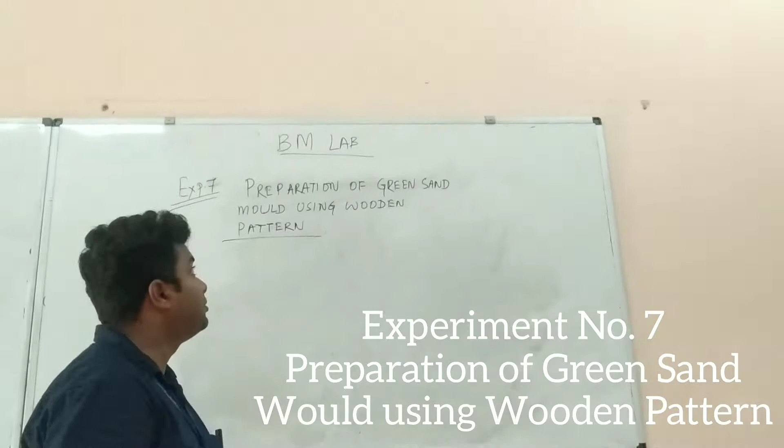So there are two important aspects of this experiment that you need to know. Already you are following basic manufacturing as your theory subject in your theory classes. From there also you can have a little bit of idea on what this experiment will let you know about the casting process. So now let us look at the important aspects of this experiment.

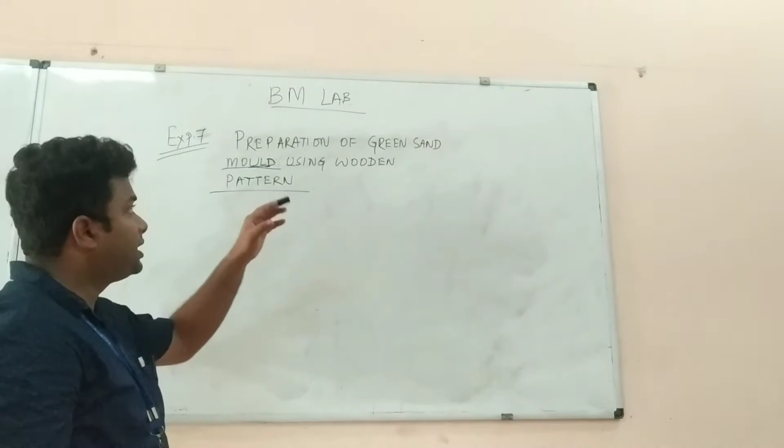One is your mold, that is basically made up of your molding sand, and another is the pattern. So we will make a green sand mold using a wooden pattern. So now patterns can be basically classified as two types. One is single piece

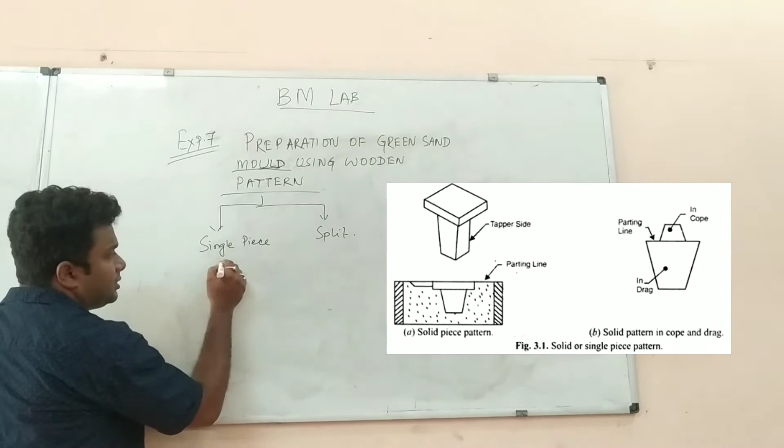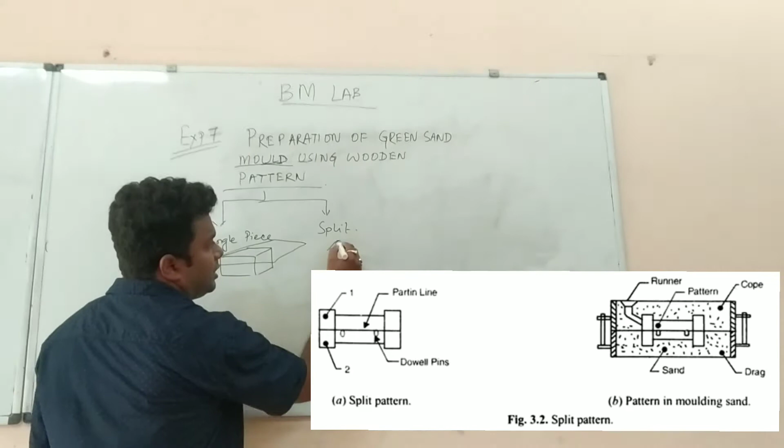or split pattern. Basically a single piece pattern is a pattern which is a single piece like this, and the same pattern, if you cut it into two halves by a section, both the halves are separately known as a split pattern. So these two kinds of patterns are generally used in industries for the pattern making or the mold making process. So this is the pattern.

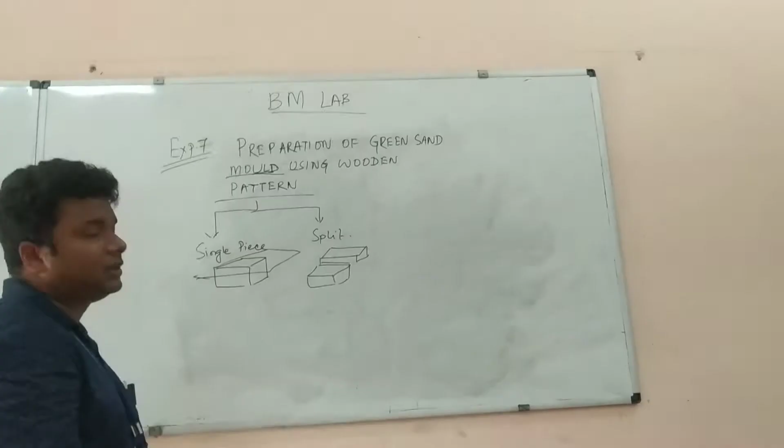Now coming to the mold or the molding sand, you have seen that in the last experiment we have done a grain fineness test where we separated the dry sand according to their sizes in several sieves to achieve two things. One is a particular permeability and another is to have a good surface finish. Now this molding sand consists of sand, basically dry sand, and clay and additives.

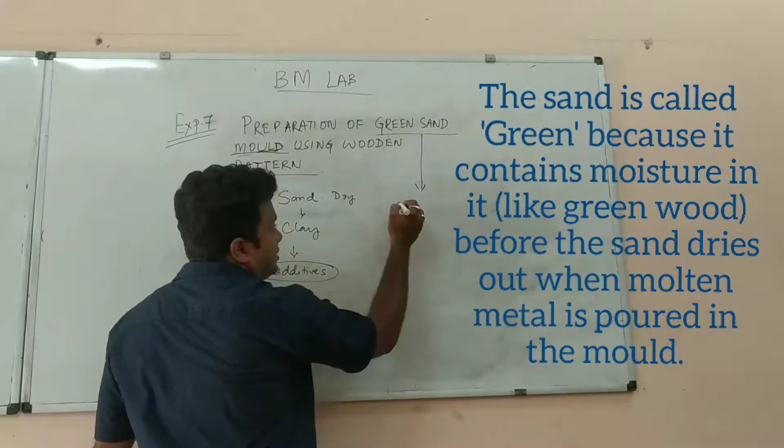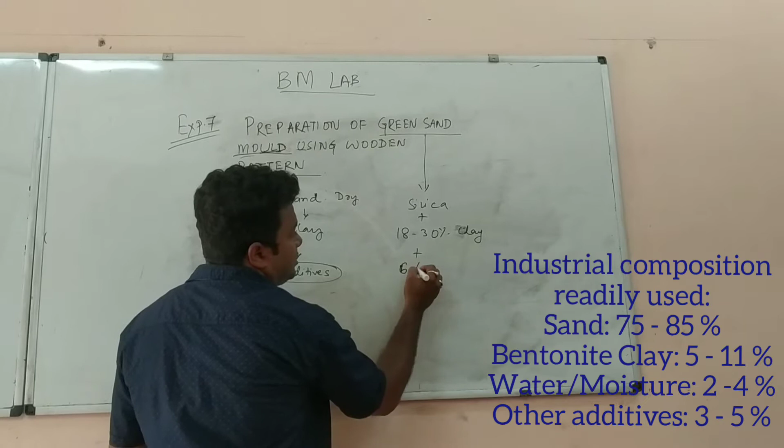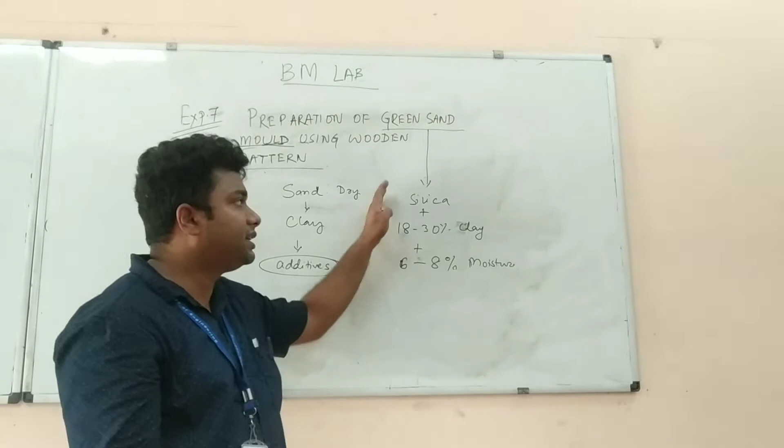Now here our mold sand is basically the green sand. Now what is green sand? Green sand is basically silica plus 18 to 30% binder, 18 to 30% clay, plus 6 to 8% moisture. Moisture is the water which we are adding. So this combination of silica, clay and moisture makes the mixture a green sand mold.

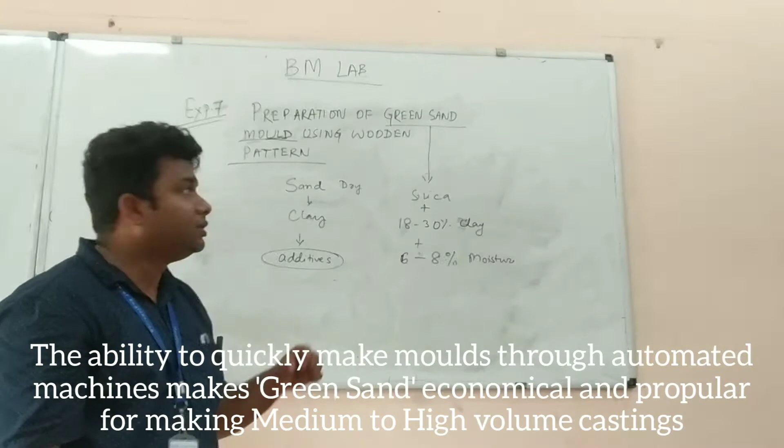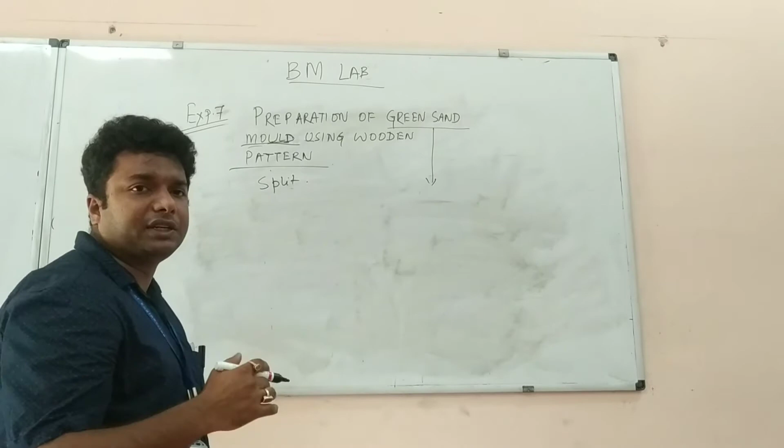So we will be preparing a green sand mold using a wooden pattern. So first we have taken the pattern. Now we will be taking a split pattern here, that is, the pattern will be equally divided into two halves, the upper portion and the lower portion.

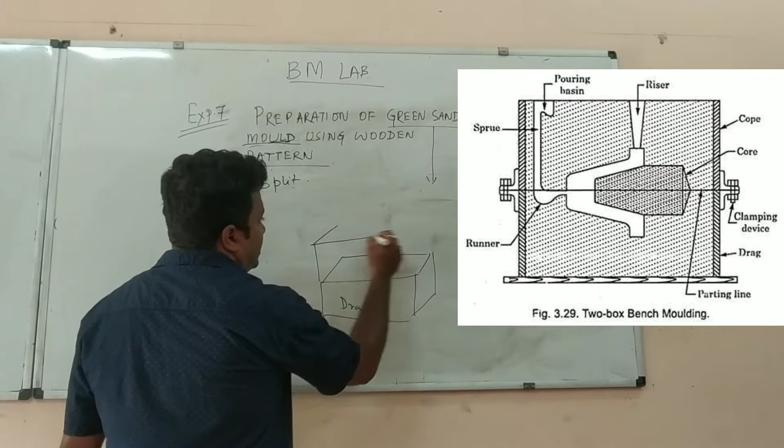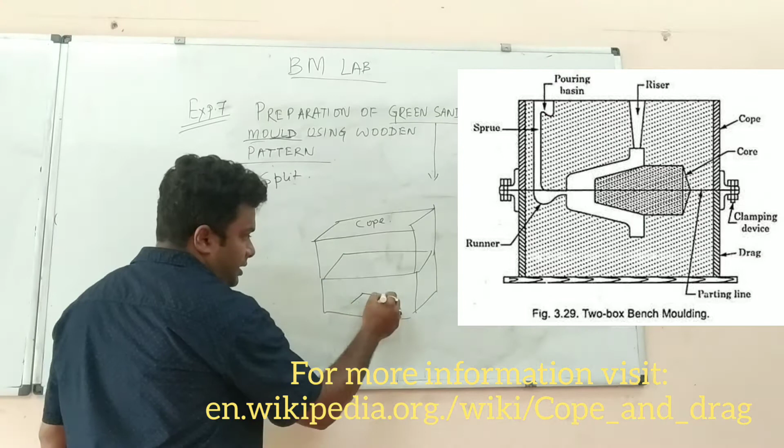And now we need to have a cope box and a drag box. So this is called a drag box, which is the lower box used for casting, and the top box which is used is called the cope box. So in the drag box, first we will place one pattern upside down like this. We will put sand here and we will ram to finish it.

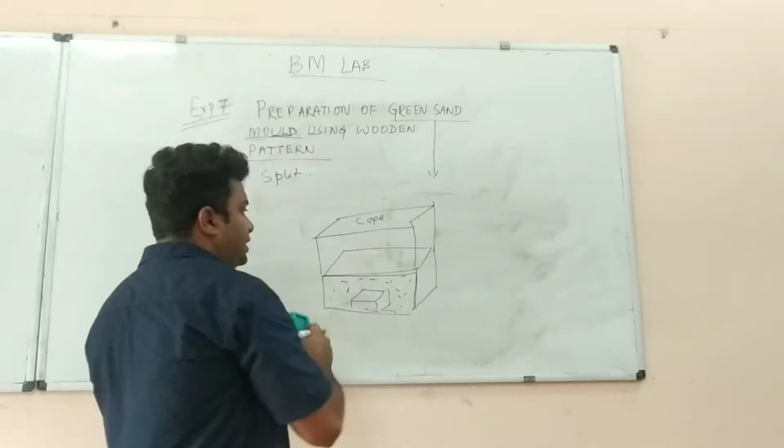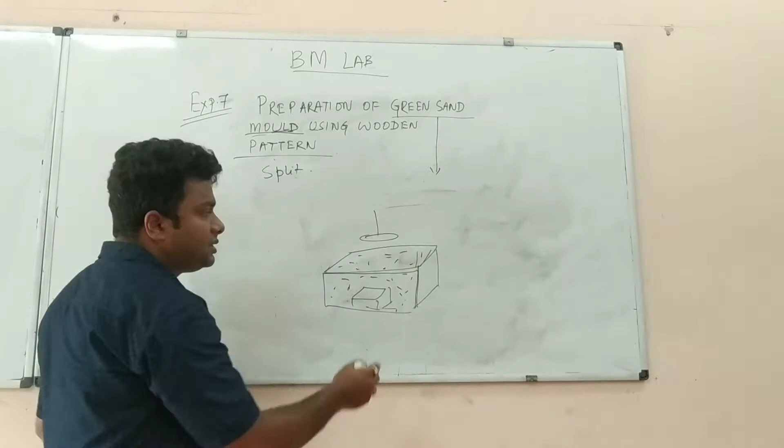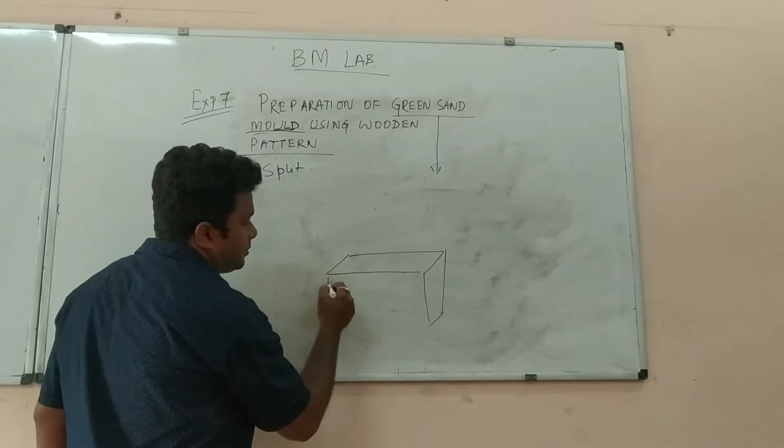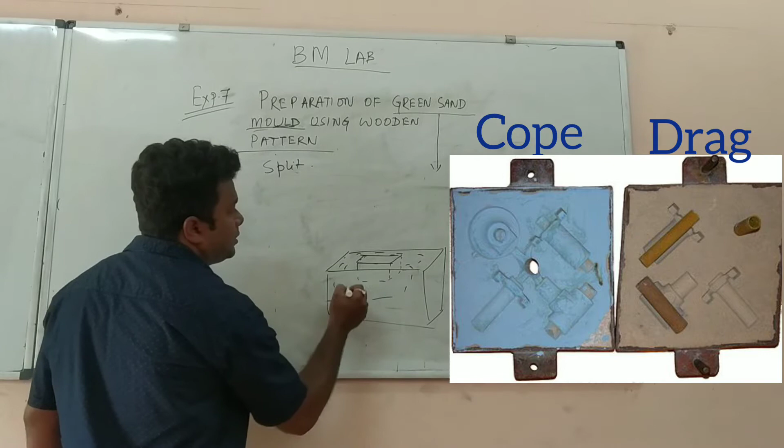Once it is finished, we will put sand and we will ram it with the help of a rammer to finish it. Once it is finished, we will invert it upside down so that it looks like this. This pattern is immersed into the sand. So this is the split pattern whose impression is taken in the drag box.

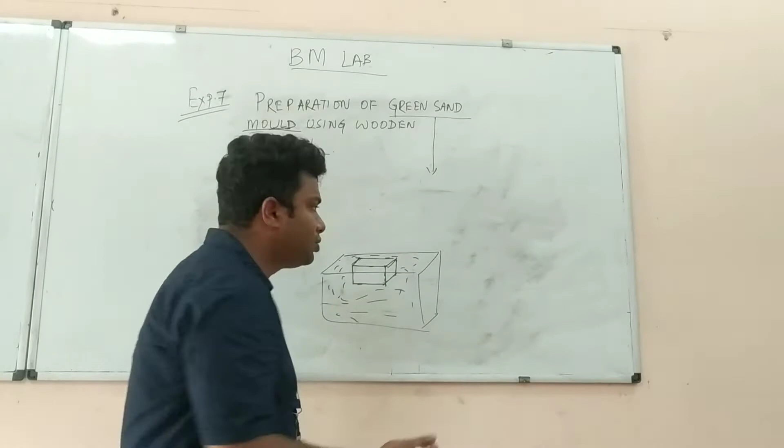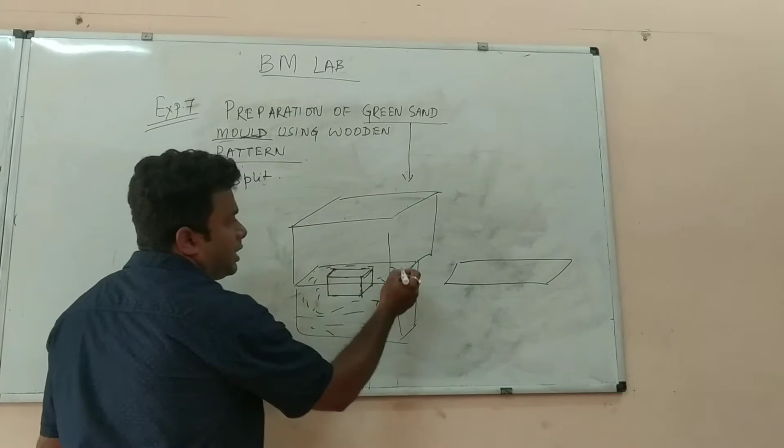Now again the same thing will be repeated for the cope box. We will first place the cope box here, and there are dowel pins here in the cope box and holes in the drag box. The dowel pins must align with these holes so that part matching can be accurately maintained.

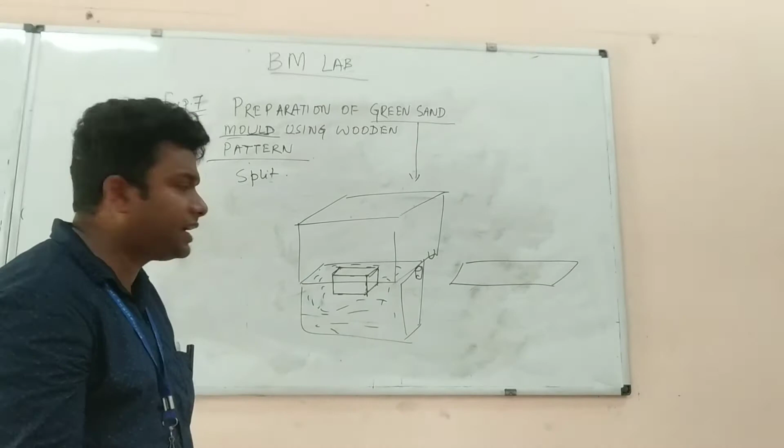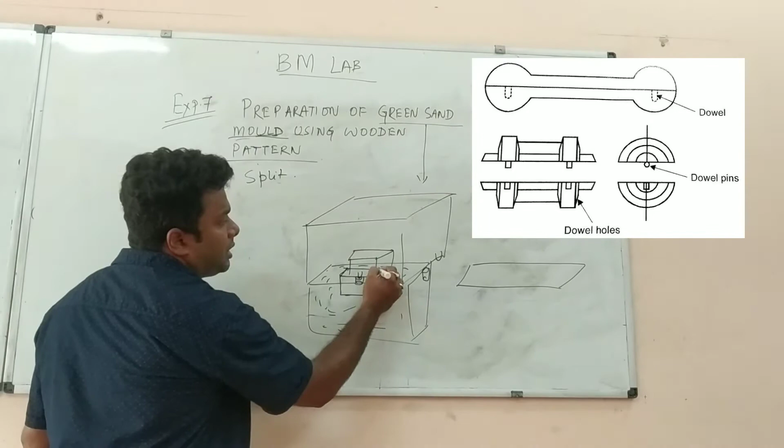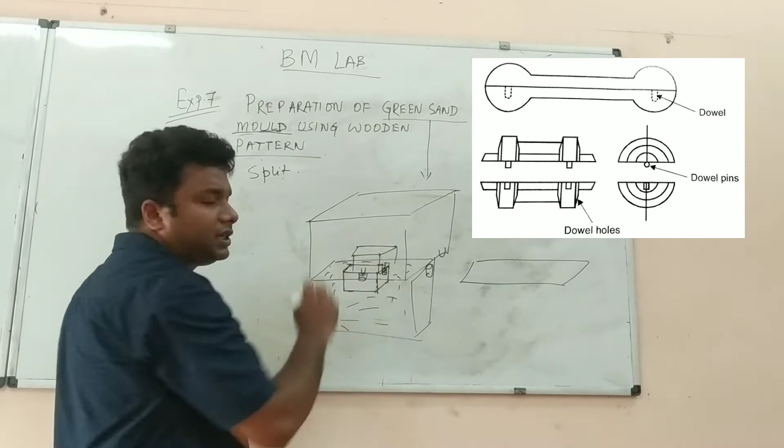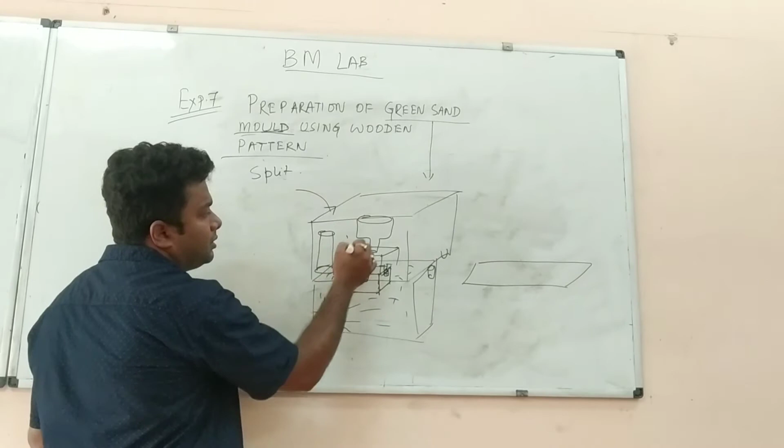Now we put the cope box on the drag box, and we will place the rest of the split pattern on top of it. We can also use dowel pins on these pattern surfaces: in the top pattern dowel pins, in the lower pattern dowel holes, to perfectly align these two pieces. Then we will put the impression pattern for the sprue, and the impression pattern for the riser like this, and we will again pour sand here. We will be putting sand and ramming it.

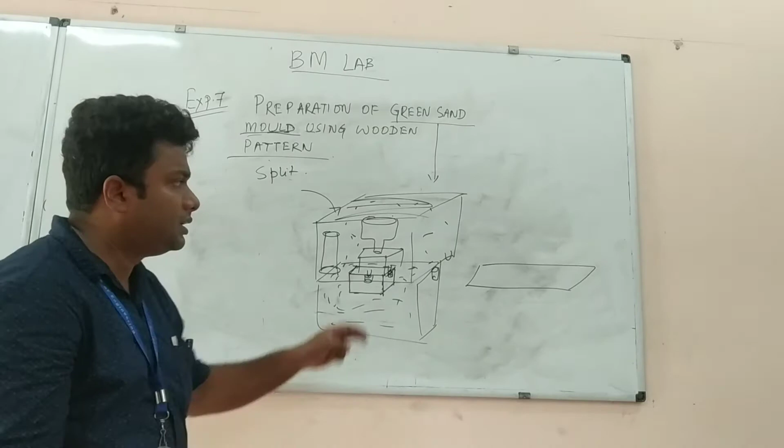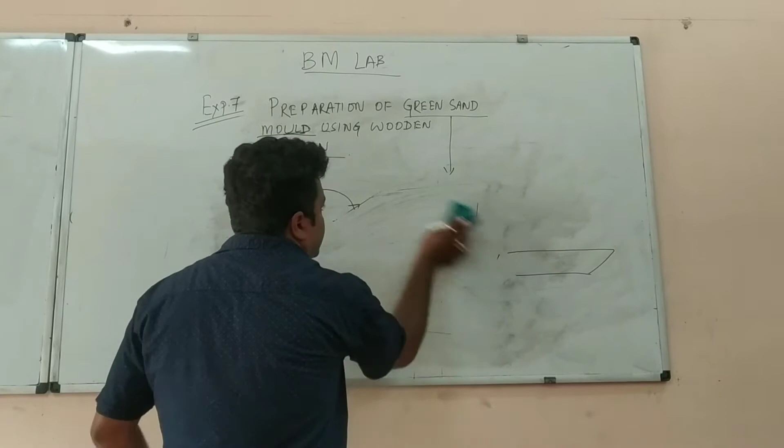In the top we will be completely ramming it, so that all the cavities or impressions are accurately taken inside this cope and drag. Now when it is complete, we will just open it up and we will take out the patterns from the cope and drag boxes.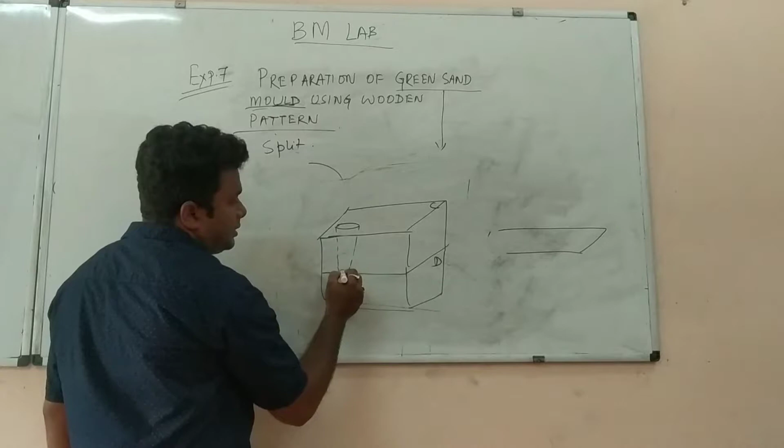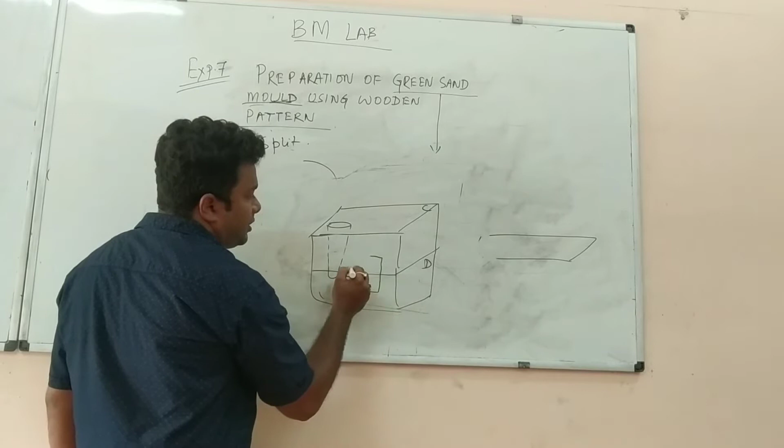Once the patterns have been taken out, then we have to make some runner arrangement for the molten material to pass into the mold cavity. This is the cavity for the lower box, this is the cavity for the upper box, and there will be a provision for the riser. So all this will be there inside the cope and drag.

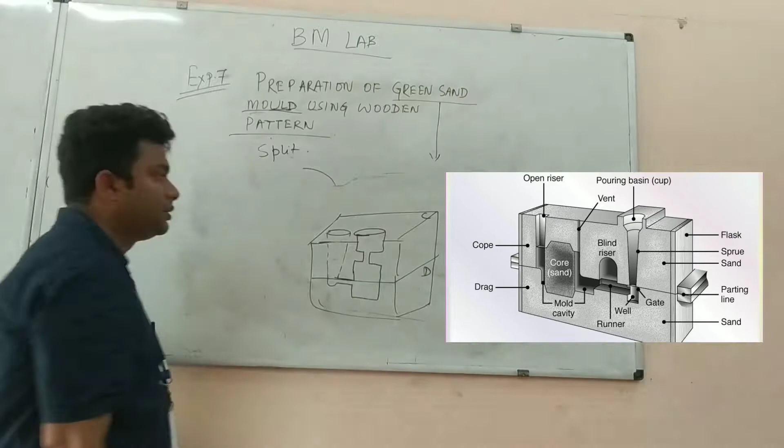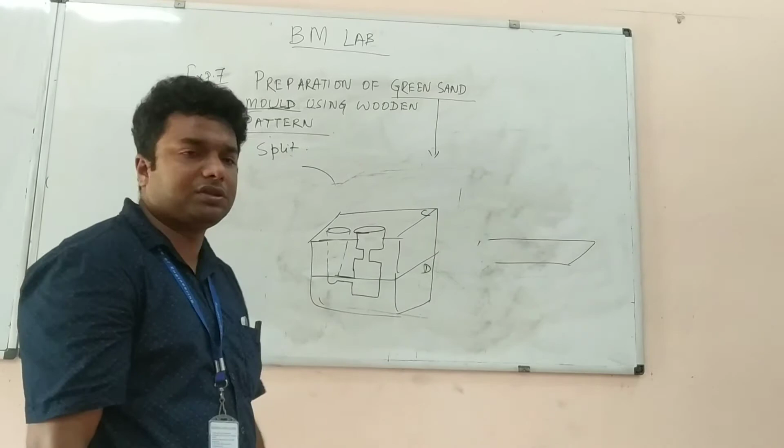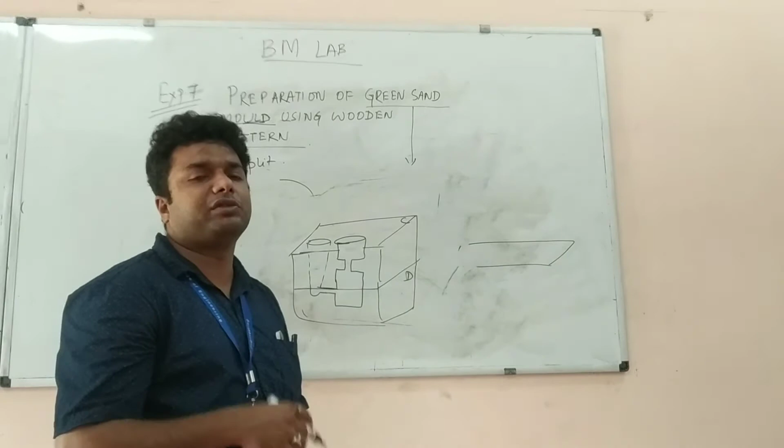Now while doing this, we have to use some special quality sands like parting sand and facing sand. Once we have taken the impression of the pattern in the drag box, on the surface of the drag box we will put parting sand, and then we will put the cope box on the top.

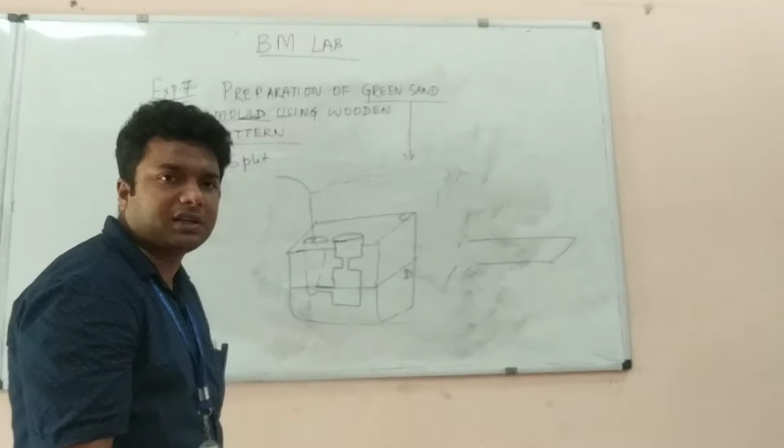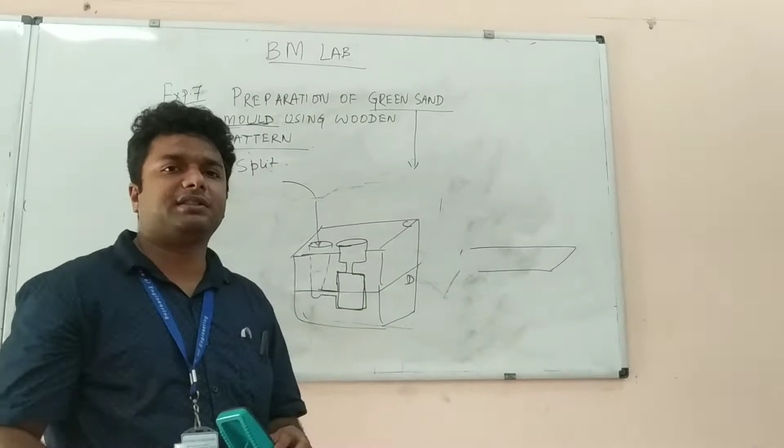Once it is done, the molten metal will be fed from here, and we will wait for a few minutes for the material to solidify, and after that we will break the mold and take out the required casting from it. We will now move to the lab to see the experiment, as most of this is theoretical, which will be explained in the lab.

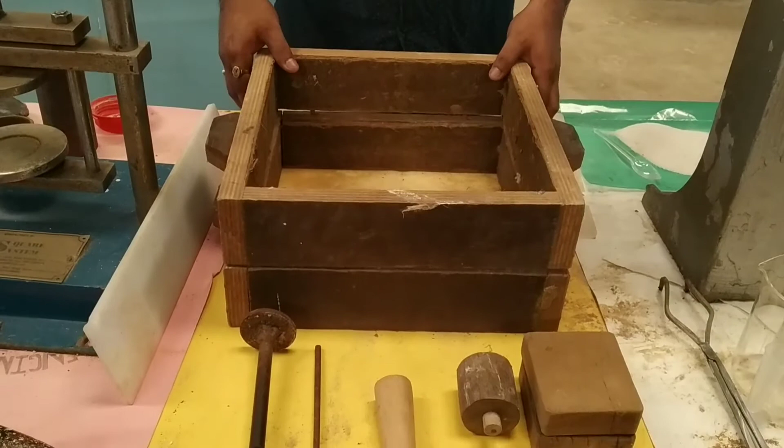The second experiment, that is preparation of green sand mold. So after demonstration we are coming to the experiment. Now let us see what are the equipments required for preparation of green sand mold. This is the cope and drag box. This is the lower box, which is called the drag box, and this is the upper box, which is called the cope box.

The cope box is attached with some dowel pins. These are the dowel pins, and these are the holes in the drag box. These dowel pins will align with these holes in the cope and drag box. Then for the experiment we need a pattern, which is a split pattern. As you can see, this is a split pattern.

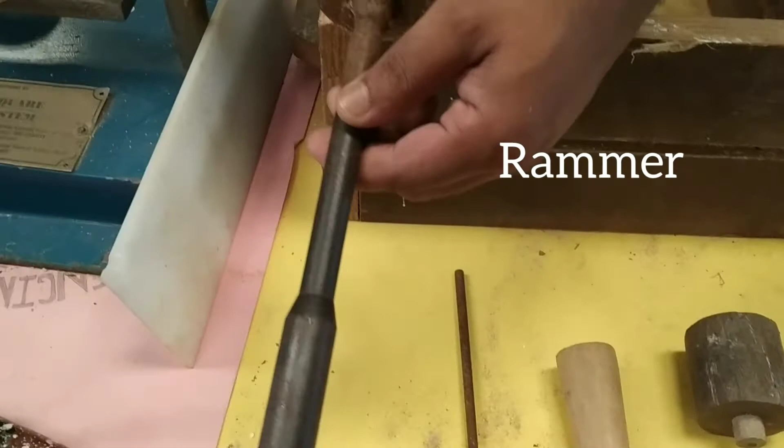This is the ramming hammer. This will be used for ramming. This is the equipment for the sprue. This will make the impression for the sprue, and this will be used for making the impression of the runner in the cope box. This is a pin which is used to vent, and we will make some runner arrangement with the help of this spoon. This is a strike off bar. This is used to clear the surface of the sand after pouring into the cope and drag.

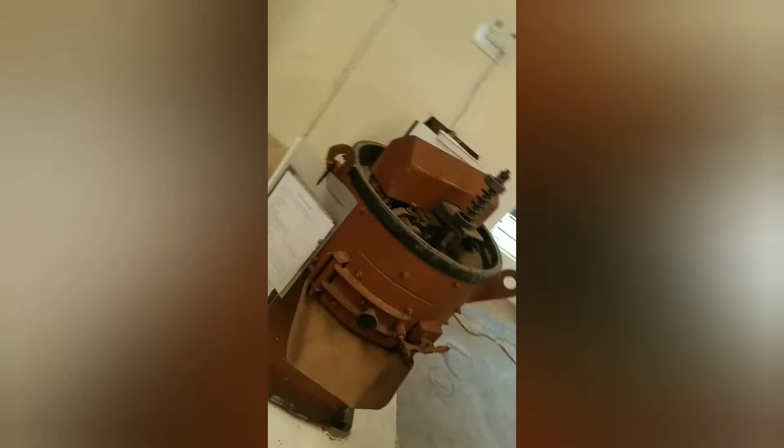Now we have come towards our sand. This is a sand mixture, as you can see. It consists of sand, clay and dextrin powder. We will add some water in this sand mixture, and after addition of water we will mix it in the Muller machine. We have added some water, and we will use this Muller machine to mix the sand properly. This sand will be first placed in the machine.

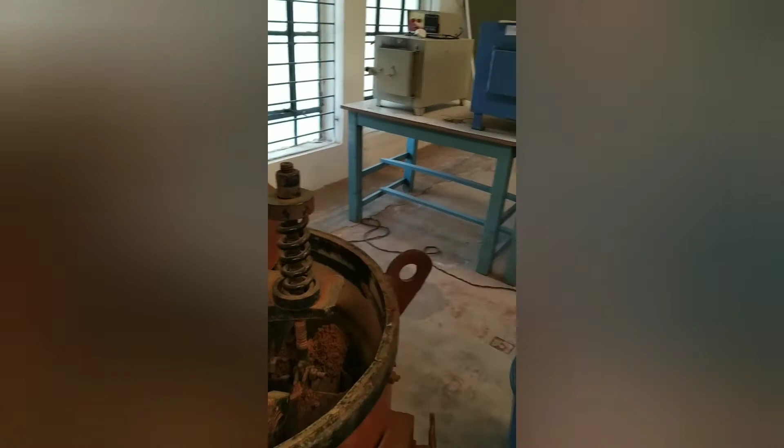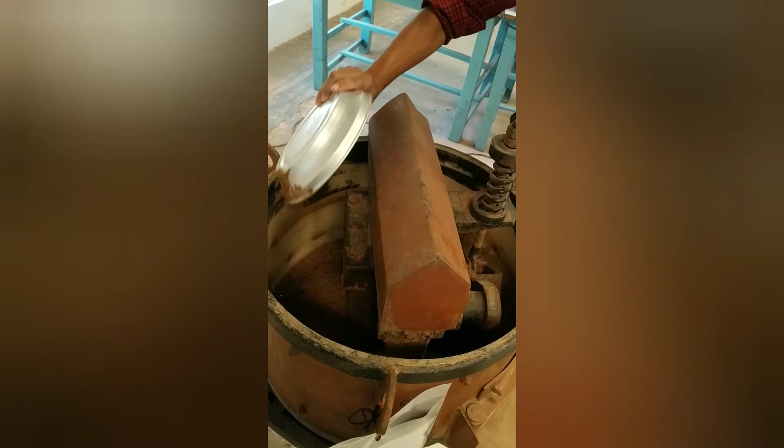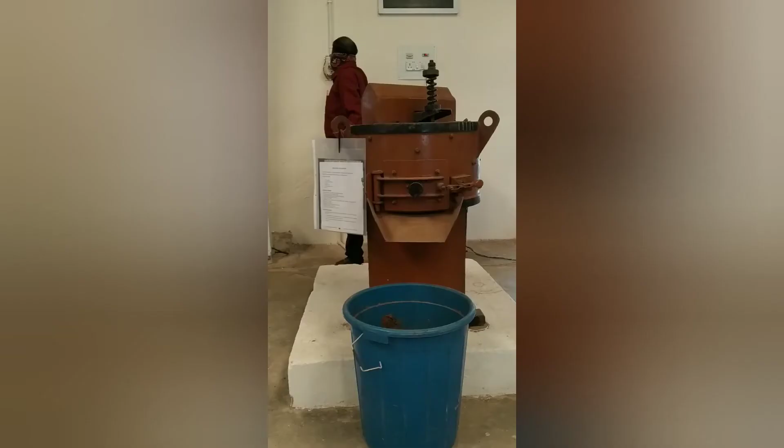We need to put the amount of sand which is required for the experiment, so a higher amount of sand is required. It is a mixture sand, prepared by mixing a proportion of sand with clay and dextrin powder. After filling the Muller machine with sand, we are now mixing it. This mixing can be seen from here. The sand is being mixed.

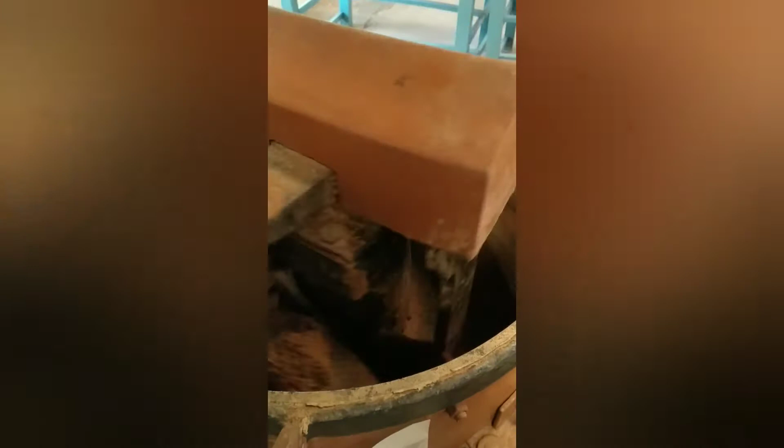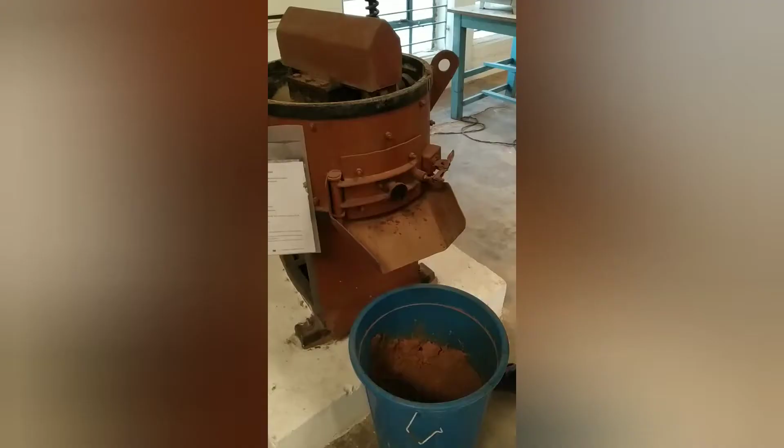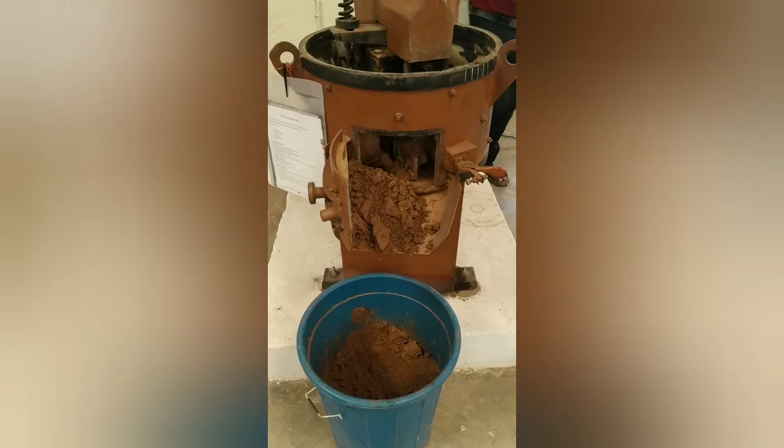After mixing the sand for a specific amount of time, we will now open the gate of the machine and we will collect the sand which we have mixed into the tub. You can once again start the machine to segregate the sand out of the jar, but be very careful and take particular precaution while doing this. After this, we will collect the sand into the jar.

Now coming to the experiment part, first we will place the split pattern into the drag box like this. This is the split pattern, these are the dowel pins, again for proper alignment of drag and the cope, proper matching. Now we have placed one piece of the split pattern into the drag box first. Then we will cover it with the sand mixture which we have prepared in the Muller machine. So this is now being poured into the drag box. This mixture is poured into the drag box over the split pattern which we have placed in the middle.

Then we have to ram the whole setup with the help of the rammer. We will be ramming the whole setup. It should be properly rammed so that it is being placed properly. Now after ramming a certain portion, we will again add sand so that it is fully filled, and then again we will ram it.

So this is a step-by-step process. You fill a small amount of sand so that the pattern is not disturbed. You have to take care of that also. The pattern doesn't get disturbed while filling the sand in the drag box or while ramming it. So we do it step by step. We fill a little bit of sand and we ram it. Then again we fill the other half section of the drag box and we ram it. Like this way it occurs.

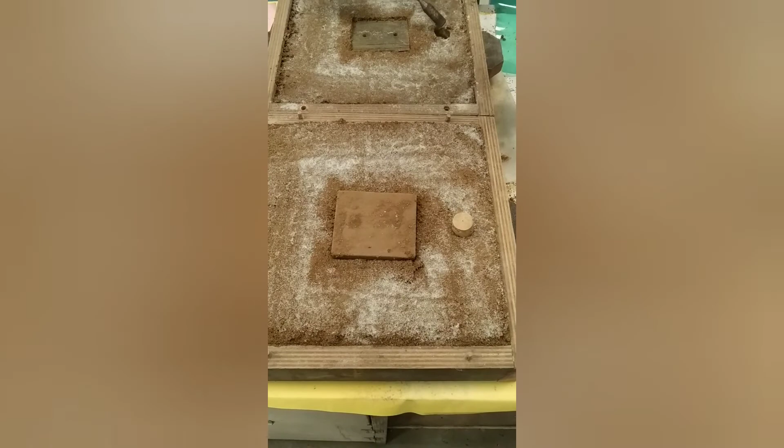Now we will invert the whole setup. After inverting, you can see the inside portion of the drag box and the cope box. You can see the split patterns which we have inserted before placing the sand. You can see the sprue hole. Here is the sprue, and the other portion of the riser is below this cope box.

Now we need to make some runner arrangement inside the drag box on the face. So we will make some runner arrangement from the sprue towards the mold cavity. This is how the runners are made. So this runner will help the material to flow from the sprue to the mold cavity.

So some runner arrangement is made and some gating arrangement will be made after the removal of the patterns from the boxes. So this is how we have made a runner arrangement from the sprue towards the mold cavity.

So a runner has been made a little bit deeper so as to make it like a bottom fill cavity. For a bottom fill cavity, the advantage is that the material flow is much smoother, and we can decrease the turbulence in the material flow by using a bottom filling pattern like that. So the deep runner is being cut into the pattern.

Now we will take out the patterns. The pattern will be taken out from the cavity carefully, so that the mold wall doesn't break, we have to look into that. So carefully we have to take it out.

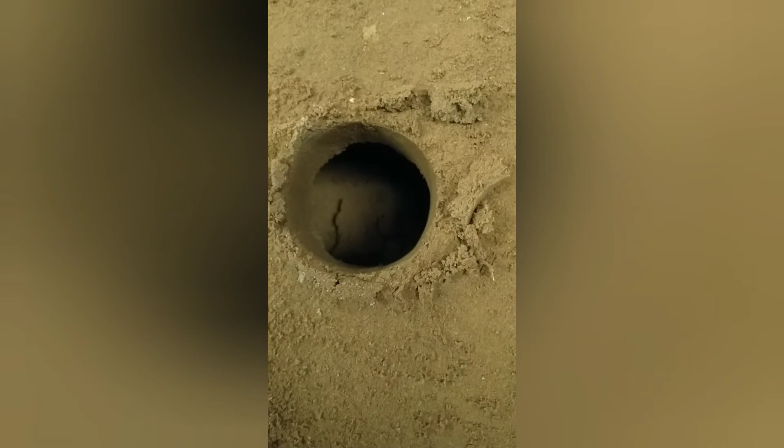So a lot of precautions should be taken while taking out the riser and the sprue pin. So you can see now the riser has been taken out, and you can see the mold cavity inside. So the riser is perfectly placed.

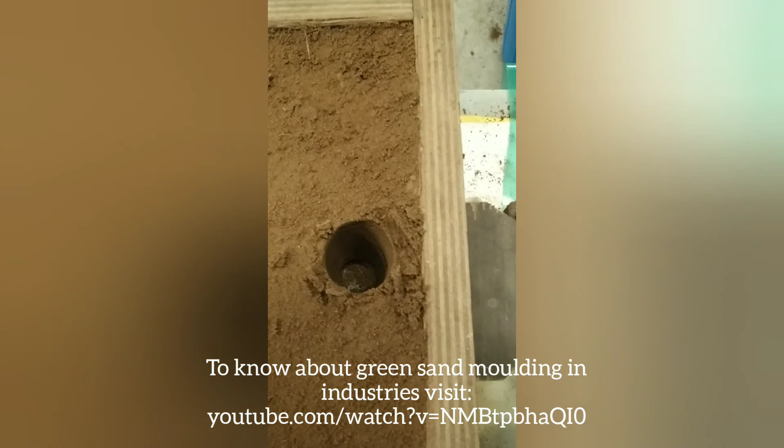So what will happen? We will pour the liquid metal into the sprue. It will go through the runner into the mold cavity, and finally it will rise into the riser. Once this is done, we will break the mold and take out the casting.